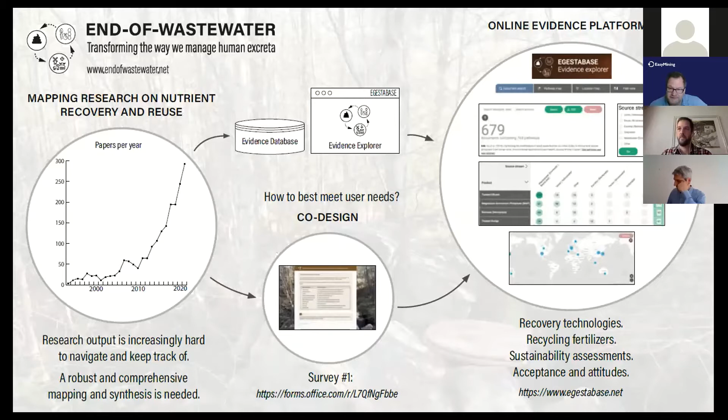Welcome everyone, and thank you for attending this presentation. My name is Adriana Romero, and I would like to present to you the LIFE ENRICH project. LIFE ENRICH stands for Enhanced Nitrogen and Phosphorus Recovery from Wastewater and Integration in the Value Chain, and it is funded by the European Life Program.

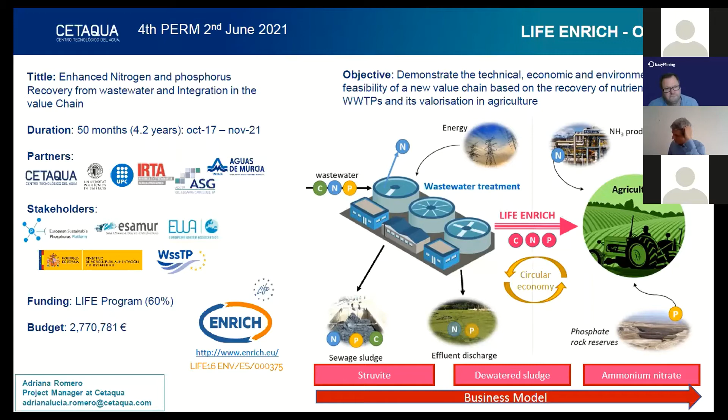Let me invite you to click this link and visit the project's website, where you can access details about the project objectives and results, as well as the partners and stakeholders involved. The main objective of LIFE ENRICH is to demonstrate the technical, economic, and environmental feasibility of a new value chain based on the recovery of nutrients from wastewater treatment plants and its valorization in agriculture. In other words, LIFE ENRICH offers a link between wastewater treatment facilities and the agricultural sector by producing biofertilizers and promoting circular economy. Today I will show you how struvite and ammonium nitrate are obtained within the project.

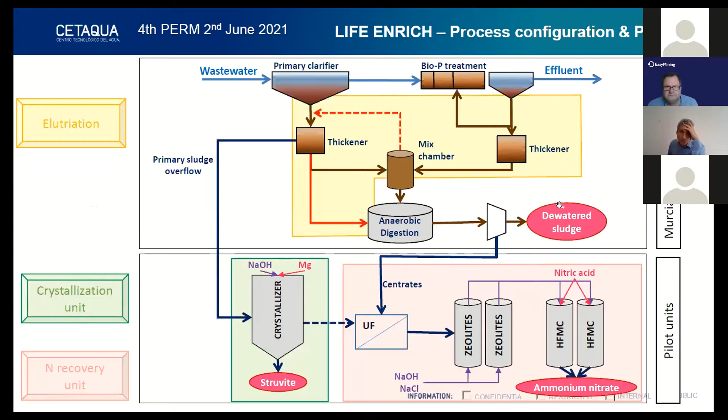Here you can see the process configuration that has been implemented in Murcia Este wastewater treatment plant in Spain. First, an elutriation process has been installed full scale, concentrating the phosphorus removed from the water line in the supernatant of the primary thickener. The supernatant rich in phosphorus is fed to the crystallization unit, where struvite is produced from the phosphate and ammonia present in the current and an external source of magnesium.

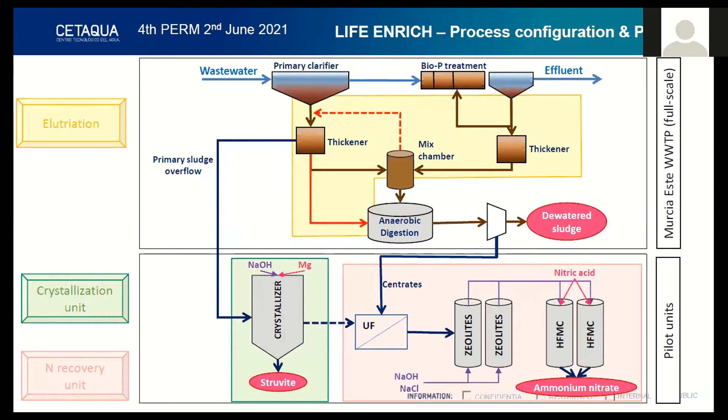For ammonium nitrate production, the centrates go through an adsorption with zeolites, where ammonium is adsorbed. Then a mixture of sodium hydroxide and salt desorbs and concentrates the ammonium and regenerates the zeolites. Finally, the concentrated ammonium goes through a membrane contactor and forms ammonium nitrate on the other side of the membrane.

Here you can see the pilot plants for struvite and ammonium nitrate production, and also what the struvite produced looks like. For the struvite prototype, a continuous operation with supernatant of primary thickener is producing about 5 to 6 kilograms per day of struvite, with a P recovery higher than 85% and a P concentration in the outlet of the crystallization reactor lower than 15 milligrams per liter.

Efforts are now being put on optimizing chemical dosing for magnesium sourcing and for pH control. Regarding ammonium nitrate production, around 40 liters per week of the salt are being produced, with an N recovery of around 70%. Currently, total nitrogen content of the ammonium salt is 7%, 50% coming from centrates and 50% from nitric acid, while aiming now to reach 20% as in a commercial fertilizer.

Both biofertilizers are metal-free, and struvite content of total organic carbon complies with quality requirements. Neither significant difference on organoleptic characteristics nor metals have been found in the vegetables grown with these biofertilizers, which are tomatoes and broccoli. Thank you.

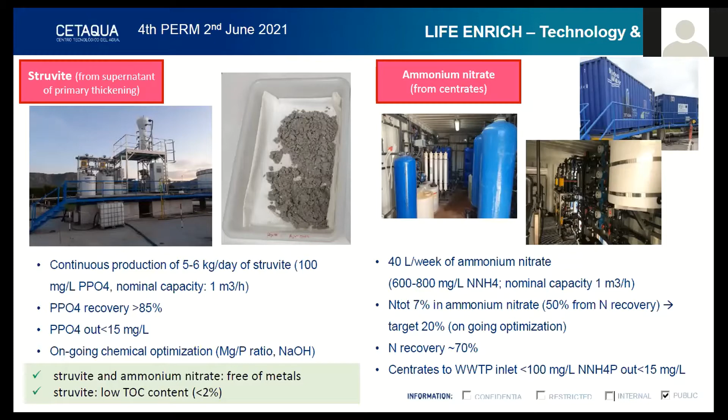Smart Plant was an innovation action with about 10 million budget and 27 partners, involving about 20 companies and several universities. Regarding nutrient management, we were integrating 6 existing wastewater treatment plants with different technologies at different treatment stages, aiming to recover nutrients and organic resources, and finally producing mineral fertilizers and biofertilizers, in particular recovering ammonium and phosphorus from secondary effluents.

This is also in order to achieve very low limits that are currently in place, for example in the UK: phosphorus recovery as struvite and phosphorus-rich sludge through side stream biological nutrient removal. You can go to the next slide.

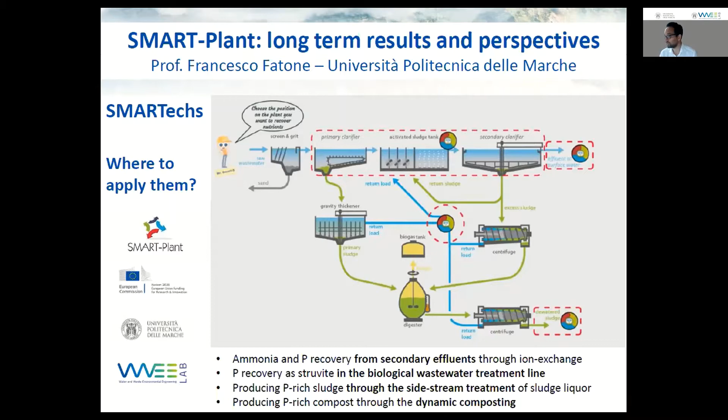How much were we able to recover? Well, our demonstration plants were operated for more than 2 years. In fact, all of them were submitted for environmental technology verification, and 2 of them were accepted. Another 2 are still under evaluation. Others were not eligible because of the pilot scale.

The challenge of Smart Plant was to address energy efficiency and greenhouse gas emissions, the water, energy, food, carbon nexus, by also targeting sludge reduction, and in parallel to recover resources and nutrients in order to have materials recovery as added value, which is of interest for utilities that are at the same time saving energy and reducing their carbon footprint.

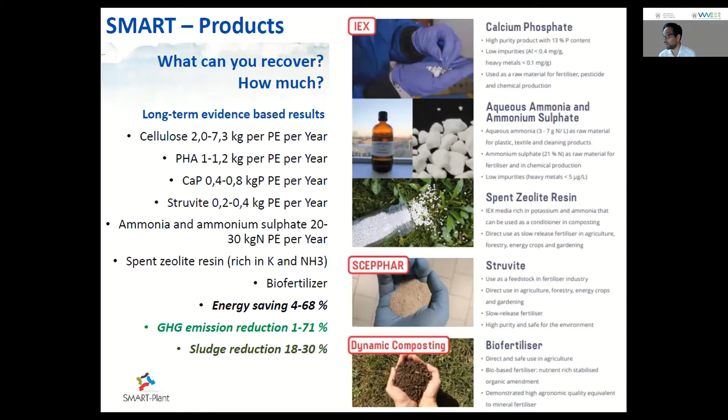Next slide. We were able to finally deliver, as I mentioned before in the plenary session, policy recommendations, because the end of waste is still a major issue, and legislation is still a barrier. To deliver these policy recommendations, we were also analyzing the potential market and the readiness of the market.

It's very interesting to see here, considering time to market and market size, that very often, especially when working with small and medium treatment plants, we have to address niche markets because the economy of scale will take time, for the merging and organization of utilities.

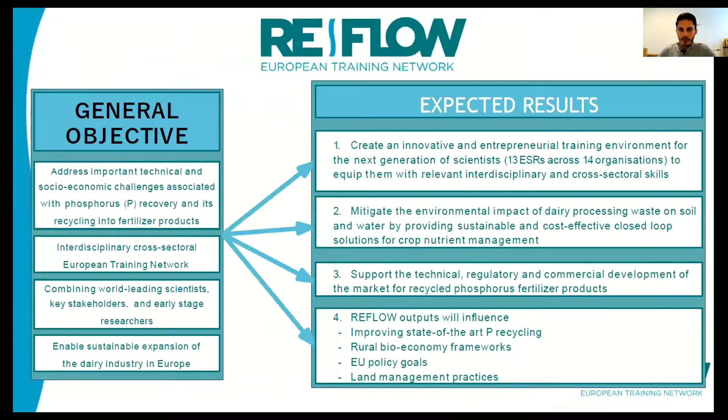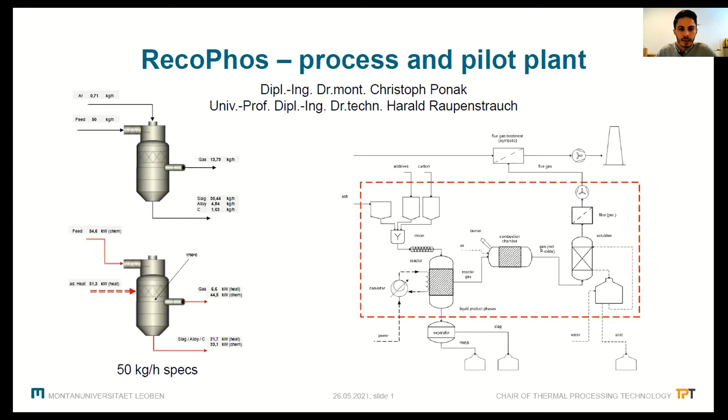These are the results that we have already achieved and confirmed. Phosphorus recovery rates in the thermodynamic evaluations are even higher. We have a full reduction of the complete phosphorus input and then a removal rate of over 90% theoretically, and over 80 to 85% validated in experiments.

What is becoming more interesting to us is the lithium-ion battery recycling that can occur in this reactor concept with the induction coils and the carbon cubes, where we can gasify lithium and also recover it as, for example, a carbonate, using these synergies in the same process. And of course, the steel making slag processing in this reactor is also still being worked on.

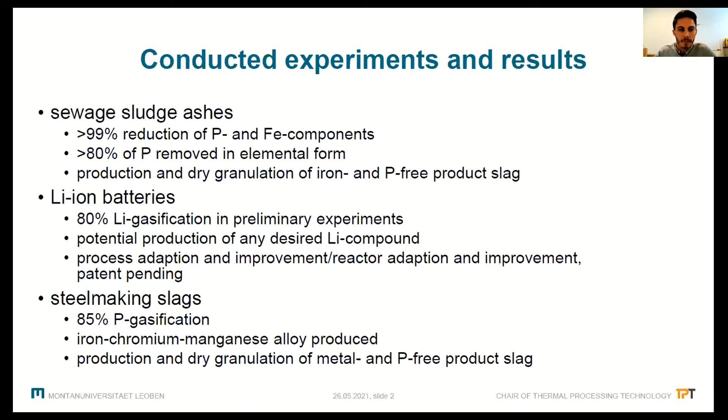Next slide, please. For the specific sewage sludge ash recycling project, the scale up to 500 kilograms per hour as a reference plant in Vienna is on its way.

We're starting a project in the beginning of next year with the consortium named here, a large process plant engineer in Austria, and Vienna Energy as the first reference plant site, in an EU project to be completed by 2024. Thank you very much.

Thank you, Christoph. If the reflow presentation is not there, then we would move on to the presentation of the HYDROUSA project, presented by Kostas Matsopoulos.

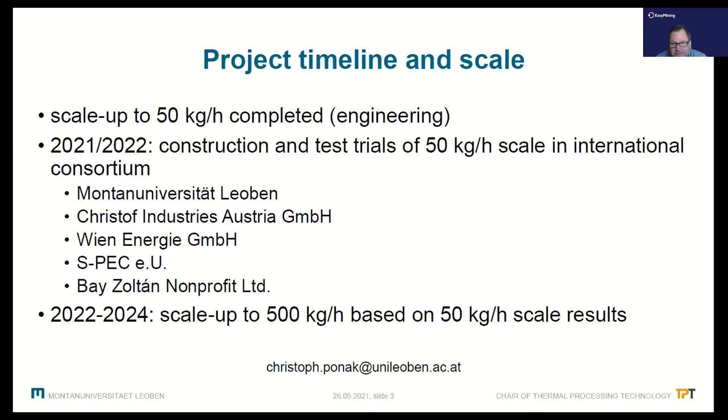Thank you, Christian, for the coordination and for introducing me. I will say a few words about the HYDROUSA project, a Horizon 2020 project coordinated by the National Technical University of Athens, consisting of a 28-partner consortium of universities, SMEs, and stakeholders from all over Europe. Our project aims to set up, demonstrate, and optimize on-site innovative nature-based solutions for the management of a wide variety of non-conventional water streams like wastewater, rainwater, atmospheric vapor water, seawater, and groundwater.

We can go to the next slide, please. The HYDROUSA concept can be briefly illustrated in this slide. HYDROUSA demonstrates at a large scale in 3 Mediterranean islands the feasibility and sustainability of innovative low-cost water treatment technologies to recover, among others, fresh water, nutrients, and energy from water.

We have a sum of 6 demo cases, which we call Hydro 1 till Hydro 6. Among them, Hydro 1 and 2 refer to an integrated wastewater treatment system and an agroforestry system closely related to each other. You can see in the center of the slide, Hydro 1 consists of a wastewater treatment system which combines anaerobic treatment with nature-based systems and disinfection, able to produce a treated effluent with appropriate quality depending on the needs of the agroforestry system for irrigation or fertigation.

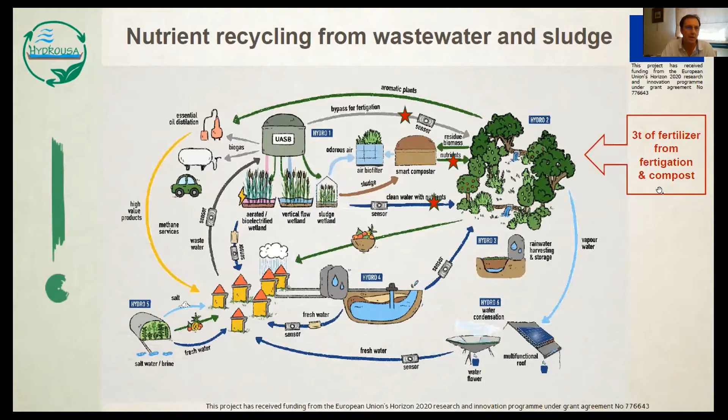I go to the next slide. Just before closing, we commenced operation a couple of months ago. Just a few photos: on the left, you can see an aerial photo from our anaerobic first stage treatment unit, which is a dual upflow anaerobic sludge blanket reactor with a total effective volume of 46 cubic meters.

On the right, you can see the two-stage vertical flow constructed wetlands. The upper one is the saturated case, and the other, downside, is a biodiverse unsaturated one. Just before closing, I should say that depending on the needs of the plants in the agroforestry system, we can switch the mode and alter the wastewater treatment in order to promote either irrigation or fertigation.

That's basically all from my side. Christian, thank you very much.

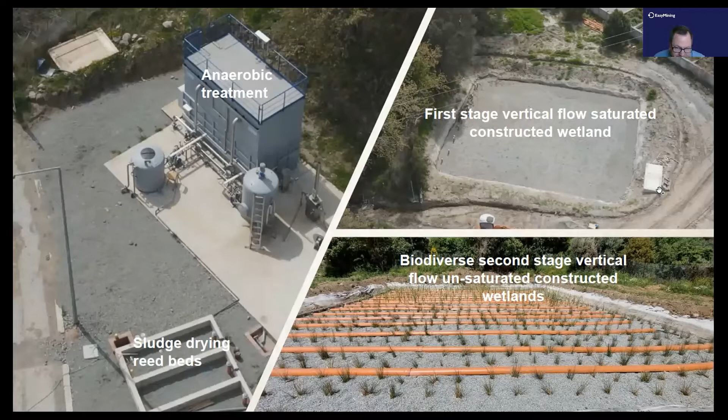Thank you. So the next presentation will be on the comparison of commercially produced struvite in Europe, presented by Mark Spiller for the project SUSVERT. Yeah, hello, I hope you hear me. Thanks for giving me the opportunity to speak here.

I will tell you about the project SUSVERT, within which we carried out a systematic overview of different struvites that are commercially produced in Europe. All the research I'm going to present here is just a small part of it.

So what did we do? We collected 25 samples, but one company was sampled twice, so effectively 24. We sampled municipal struvites as well as industrial struvites, mainly agri-food struvites, and compared their chemical, physical, and biological characteristics to the available regulation in the new fertilizer regulation mentioned earlier, along with plant tests on these struvites.

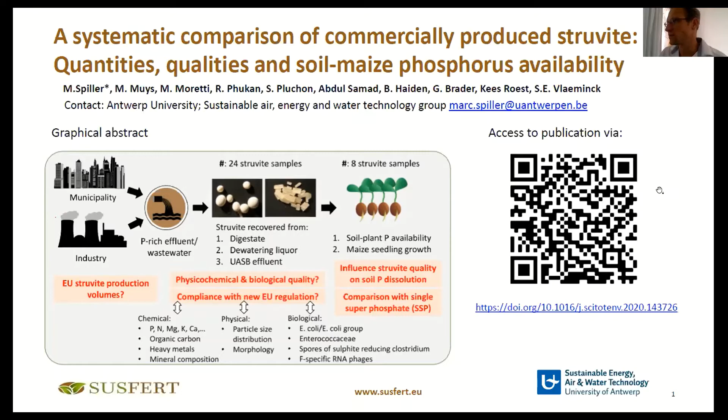We also looked not only at regulated properties, but also at morphologies that are maybe not regulated. We went a bit beyond, with the objective of seeing whether struvite could be an alternative in the common European market, or meet the newly set requirements.

I'll give a short overview here and not talk about everything, looking mainly at the chemical quality. The good news is that most struvite samples contain really good amounts of phosphorus, close to the theoretical level of 12.6% P in dry weight, with only 12 samples deviating more than 3% from that.

We also looked into heavy metal content. All samples were below the prescribed limits, though zinc was somewhat elevated. I won't show the data here, but you can access it through the paper.

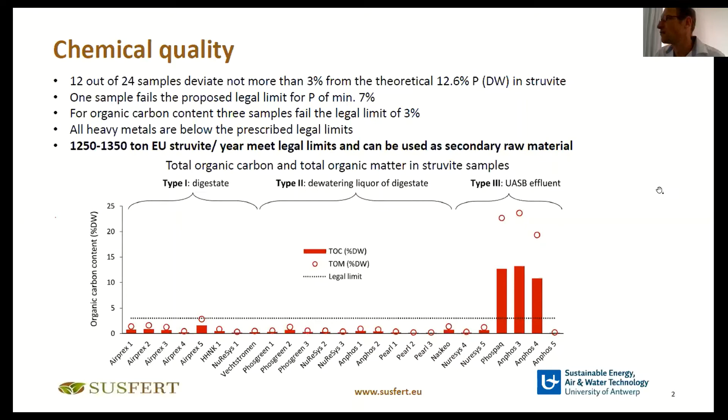There's a small mistake here - this should read tons of phosphorus in EU struvite. Based on our estimations, between 1,250 to 1,350 tons of European P in struvite per year meets the legal limits and can therefore be used as a secondary raw material.

As you may have noticed on the previous slide, we distinguish between different types of struvites in our research: those from digestate, those from the dewatering liquor of digestate, and those from UASB effluent, mainly from potato wastewater, shown in that figure. This is important because we see differences between those struvites, as shown in the figure.

Those coming directly from digestate and precipitated there have a typical orthorhombic shape, really looking like a crystal. Those coming from the dewatering liquid, especially some from UASB effluent, look nicely granular, almost like you'd want for a fertilizer.

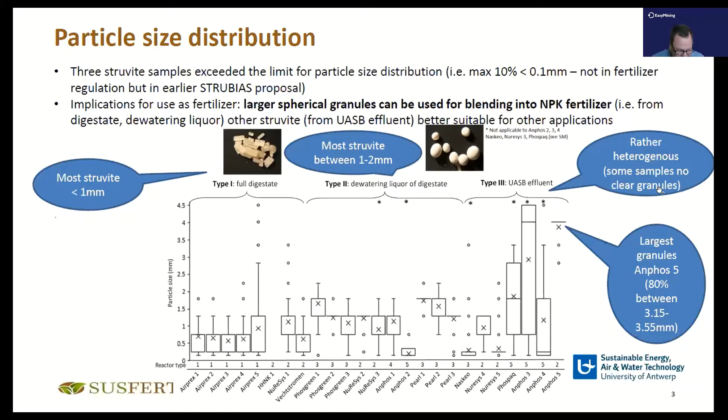Okay, hello everyone. I want to thank you for the opportunity to tell about our TYPKI project, which is resource-wise nutrient recovery from industrial wastewater or process waters.

We are dealing with industrial waters from mining, energy, and pulp and paper. It is a 2 year project, started just recently and financed nationally in Finland.

Business Finland is the main financer, but also VTT, University of Oulu, and industry have financed the project. I think we have gathered quite a good composition of companies, covering the whole nutrient value chain, starting from wastewater producers, technology suppliers, manufacturers of nutrient products, and end users.

Our main target is not actually nutrient recovery, but rather the focus is wastewater purification and pure water production. But because in every case we will produce concentrates, they need to be either utilized or safely deposited. That is really the main issue in this project.

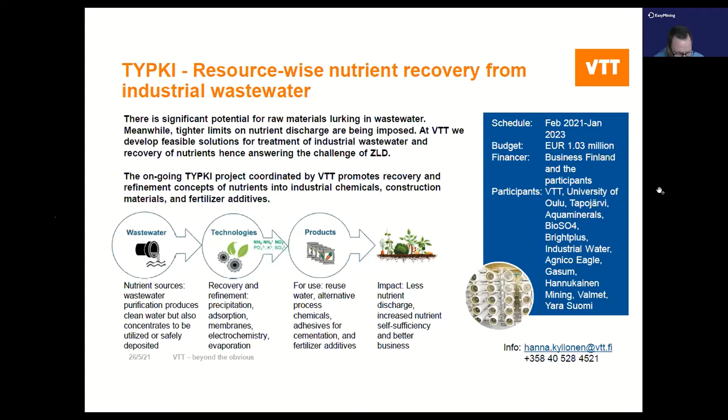Good morning, I'm Nicolas Morales, member of the Innovation and Technology Department of Aqualia, presenting the segregated collection and the decentralized treatment for resource recovery as proposed by the H2020 project Run4Life. In the project, we want to change the conventional, centralized and linear domestic wastewater treatment for a more circular approach based on decentralized treatment at the source.

We want to separate at the source black water, kitchen waste, and grey water, in order to apply technologies that allow us to recover more resources from that wastewater. For doing that, we also develop some innovative technologies and new business models.

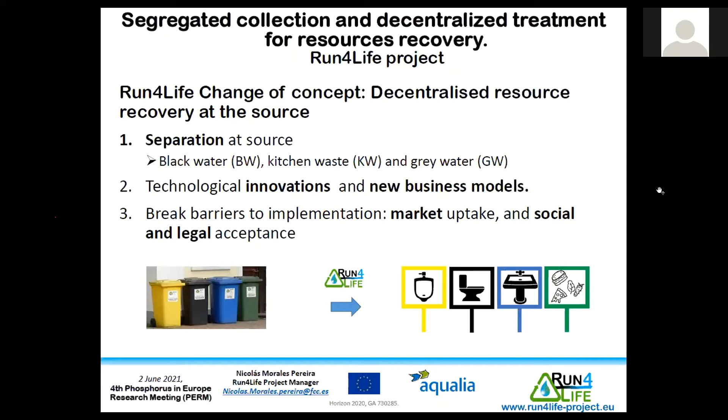In the project, we also have to take into account that we need to break barriers to achieve a good implementation, to achieve market uptake, social and legal acceptance. So we want to apply something similar to waste segregation to wastewater treatment, doing this segregation and decentralization. Next slide.

Here we can see a general flow chart. We have a segregation of streams in the buildings, in homes, in new areas. We apply technologies based on anaerobic processes to recover the energy from the concentrated streams, the black water and kitchen waste, and then technologies to recover the nutrients from the effluent of the anaerobic processes.

For the grey water, as this is a stream with a low concentration of pollutants, we can reclaim that water for toilet flushing, for process industry uses, and also for irrigation. We also develop technologies to increase the concentration of black water, such as the use of ultra low vacuum toilets that use only 0.5 liters per flush or even lower. So this is the general flow chart.

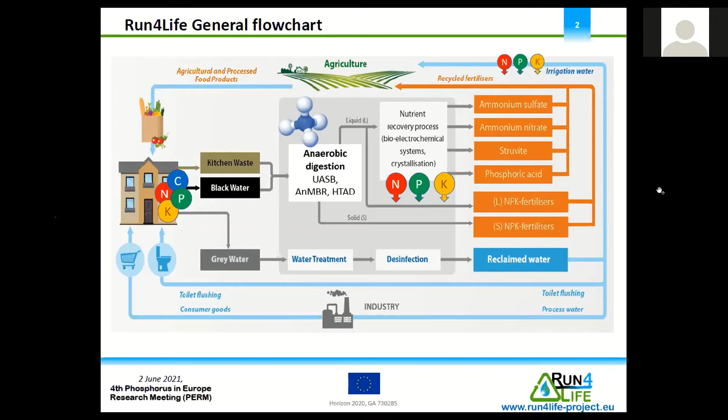In Helsingborg, the NPK pellets, that is a combination of food waste sludge from the anaerobic digester, struvite, ammonium sulfate, and commercial potassium chloride in the form of pellets.

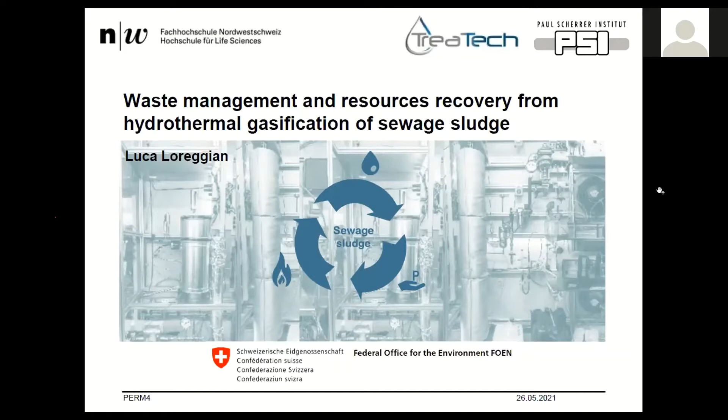Next slide, please. This is an overview of the project. In black you can see what has already been established and developed by TreaTech. By means of hydrothermal gasification, they can process digested and undigested sewage sludge to generate biogas. So biogas is the main product of the process, but there are some side streams that still contain valuable resources. This is the case of processed water, which contains ammonia, and the wet solids that come after the processing of the sewage sludge. These wet solids are very high in phosphorus, and this is why we are teaming up.

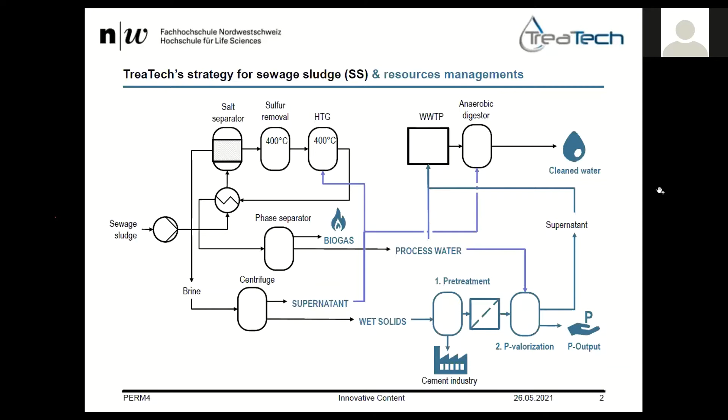To recover phosphorus, we are currently looking at different potential routes to recover phosphorus. We'll be looking at struvite precipitation or phosphoric acid production. And that's it. Next slide. I will thank you for your attention. I have my contact details in case you have further questions.

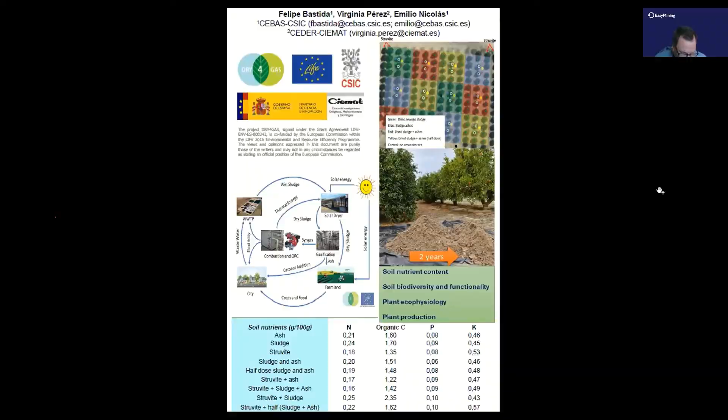I'll be talking about phosphorus recovery from bio-waste. The project we're talking about is Value Waste. It is one of the Horizon 2020 projects. The concept of Value Waste is that it is one of the first complete solutions to fully valorize urban waste to recover energy and nutrients in the form of food, feed, and bio-based fertilizers. I would like to call it state of the art, as the urban waste is completely used as a raw resource in a chain of processes to produce these high value products that have multiple economic, social, and environmental benefits.

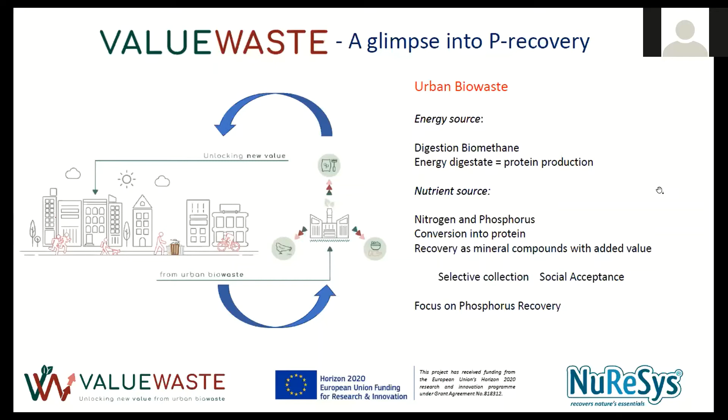Next slide, please. This project is implemented in 2 municipalities in Europe. The municipality I'll be talking about is Murcia, Spain. Different partners combine their pilot units in the process. It starts with the collection of bio-waste, which is 4 tons per day, and it is selective collection, which is very important for quality control. It is then fed to an anaerobic digester at the rate of 4 tons per day.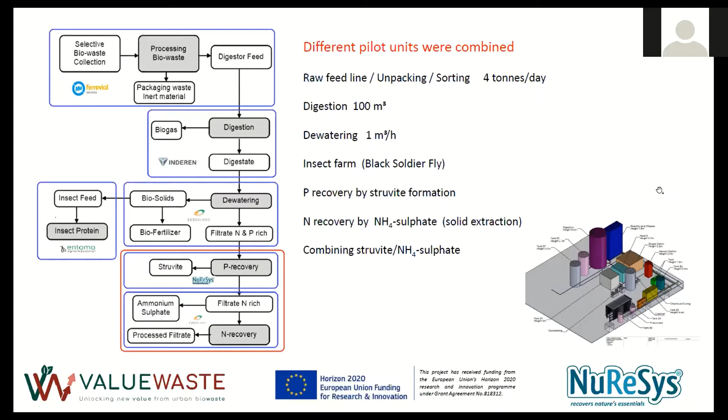The methane produced during the anaerobic process is fed to methanotrophic bacteria to produce microbial protein, and then the digestate is dewatered. The dewatered solid fraction from the biosolids is fed to the black soldier fly, which is used as insect protein. The liquid fraction from the dewatering is rich in nutrients of nitrogen and phosphorus, which is then used to recover bio-based fertilizers.

Next slide, please. So the NuReSys process in general — here you can see on the right-hand side of our screen the pilot that is installed in Murcia.

So the digestion process really helps to release the phosphorus and nitrogen from the solid phase to the water matrix, which is then extracted through the dewatering, and the liquor is very rich in orthophosphate and ammonium nitrogen concentrations.

For this particular project, our installation consists of a stripper and a crystallization reactor. The stripper is fed at a rate of 1 cubic meter per hour, and it helps to strip off the carbon dioxide, which helps to raise the pH. Then the water enters into the crystallization reactor where the magnesium ion is dosed, and through pH control we are able to precipitate out the struvite.

To discuss the progress so far, we are already working to optimize the dewatering of the digestate to increase the level of orthophosphate and ammonium in the liquor, so that we can start the production of struvite, which is expected to be 2 to 2.5 kilograms per day.

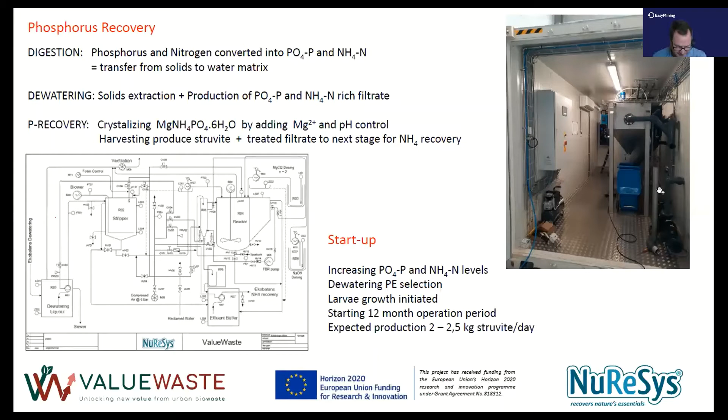I would like to talk a little bit about Water2REturn, which is a Horizon 2020 innovation action. We treat wastewater from slaughterhouses and extract the nutrients contained in there to further manufacture agronomic products. This way, we try to turn the wastewater treatment facilities included in the slaughterhouses into biorefineries.

So this is the system. There are 3 treatment lines plus an energy recovery module, and all of them work in cascade. We take the wastewater from the slaughterhouse that goes directly to the water line, where we treat it with an SBR, and afterwards with a filtration unit.

So we obtain, let's say, 3 materials: treated water on one hand, sludge on the other hand that is going to feed the following treatment line, and a concentrate of nutrients, which is going to be the first secondary raw material to further manufacture the first agronomic product, a fertilizer.

Then the sludge coming from the SBR feeds the sludge line, where it is going to be fermented together with bacillus, and we are going to obtain a hydrolyzed sludge that is going to constitute the secondary raw material to further manufacture a biostimulant.

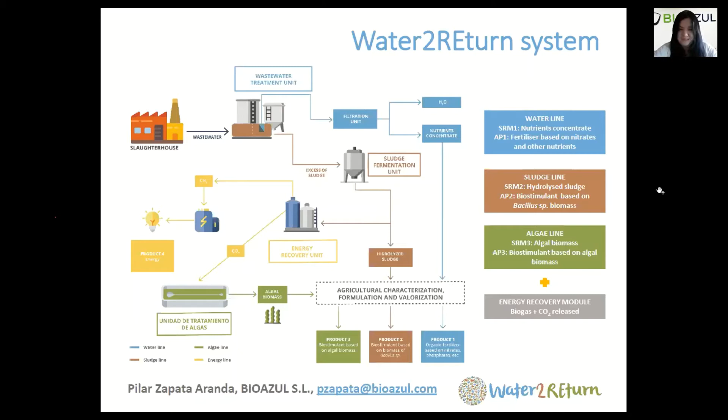This is the aspect our system has. It has been built in a real slaughterhouse, called Matadero del Sur, located in Salteras, a municipality near Seville in Andalusia, Spain. It treats 50 cubic meters of flow per day out of the 150 cubic meters that the slaughterhouse produces per day. This is because it is a demonstration project, and therefore we cannot do it at a real scale.

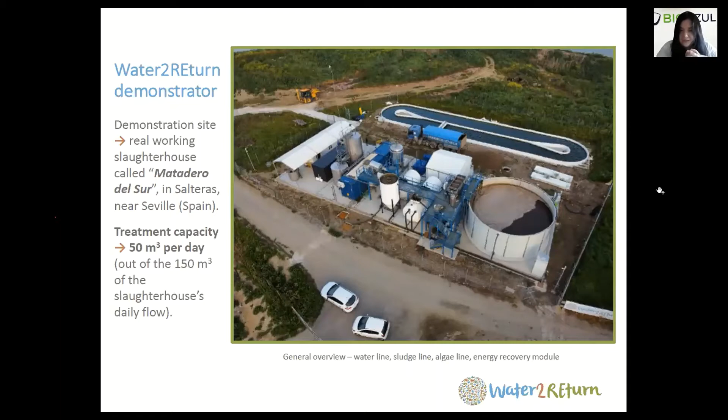Next slide, please. The key innovation and results are the integrated treatment system with separated treatment lines, because the system is modular and very flexible. This means it is possible to adapt it to different kinds of industries, use only part of the treatment lines, etc. It's also highly replicable because it's flexible and can be adapted to other food industries. The other key innovation results are the secondary raw materials and the agronomic products I have been mentioning before.

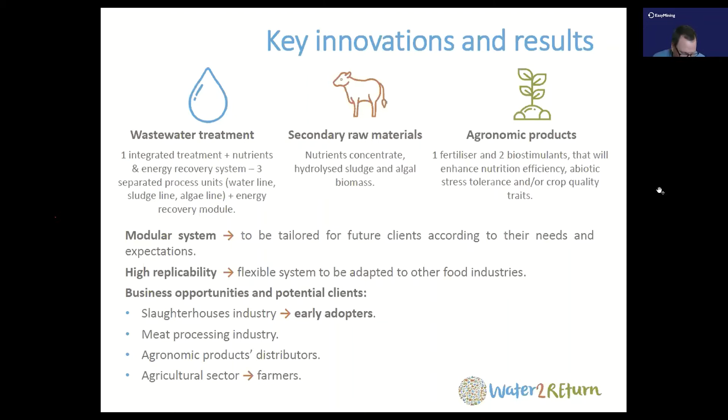First I will present vivianite. Vivianite is a new approach to recover phosphorus from sewage treatment plants that dose iron coagulants for phosphorus removal. The advantage of the process is that it can have high recovery efficiencies of over 50% of the influent phosphorus, and it reduces 10 to 20% of the sludge volume.

The principle is based on the finding that in these sewage treatment plants where iron is dosed, vivianite is the main phosphate-bearing precipitate in the digested sludge, and up to 70 to 90% of all phosphorus in the sludge can be present as vivianite. We can use wet magnetic separators to recover the vivianite from the sludge.

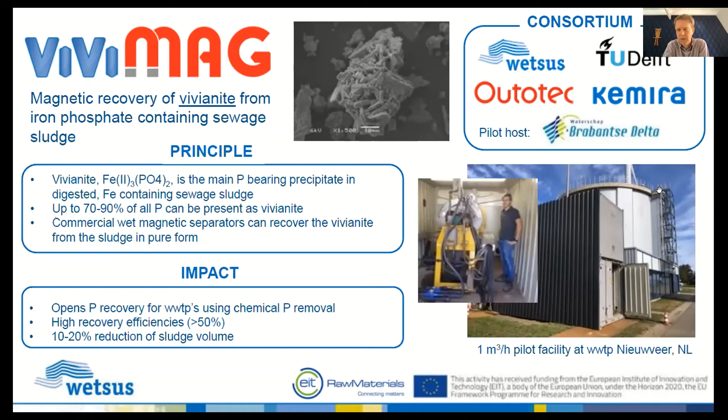We've demonstrated this in the ViviMag project at a scale of 1 cubic meter per hour at a pilot facility at the sewage treatment plant of Breda in the Netherlands. Next slide.

So this slide shows the principle behind the magnetic separator. We use magnetic separators that have been used in the mining industry for decades. These magnetic separators consist of a wheel that is dipped into the sludge and is then magnetized.

This wheel consists of a lot of rods that are then magnetized, and the vivianite sticks to these rods. The rods are then transported by the wheel outside the magnetic field and can then be easily flushed off from the magnetic wheel again and recovered.

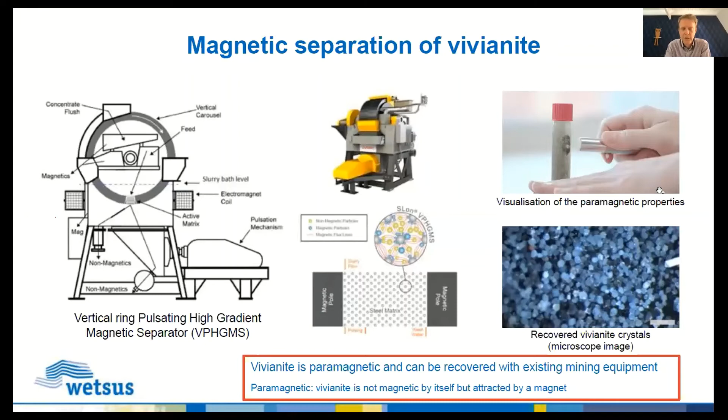To the right, you see an image of these crystals that we recover. Typically, they're in the size of around 100 micrometers. And the small image also shows the magnetic properties of the vivianite. Next slide.

But this other material can be easily washed off by a washing process, and then we can get up to 90% purity of the vivianite concentrate that we make. And overall, we can recover 60% from the sewage influent.

Vivianite can be used in the short term as an iron fertilizer to treat iron chlorosis in plants. On the longer term, we envision a splitting of the iron and phosphate so that we can reuse the iron again to bind the phosphate, and we get a water-soluble fertilizer. And we are now scaling up the project together with the partners.

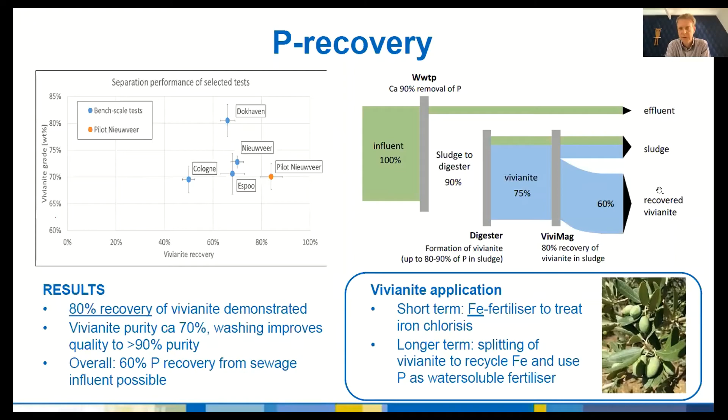Next slide, which is about the next new project, part of the larger water mining project, which is a big EU H2020 financed project with 38 partners over 12 countries that focus on 5 different case studies. The water mining project aims at resource recovery from various water streams, such as desalination, urban wastewater, and industrial wastewater.

As Wetsus, we will look at applying reversible phosphate adsorption to achieve ultra-low phosphorus removal. So we use adsorption to really go down to 40 ppb of phosphate in the effluent.

Using these adsorbents, the special thing about the approach is that we are able to regenerate the adsorbent in line, and in that way you get a concentrated liquid phosphate recovery product that can be used as a fertilizer. It also allows reuse of the adsorbent over and over again. This is important because at these low phosphate concentrations, you have quite low loadings of the adsorbent.

We will be testing this in a 1 cubic meter per hour pilot facility for 1 year on Cyprus and 1 year in Spain, to demonstrate a removal down to 40 ppb.

The main reasons to remove phosphorus to these low levels are twofold. First of all, you need to go to these low levels to prevent algae blooms. The second reason is that you can also prevent biofouling in subsequent steps, for instance, desalination.

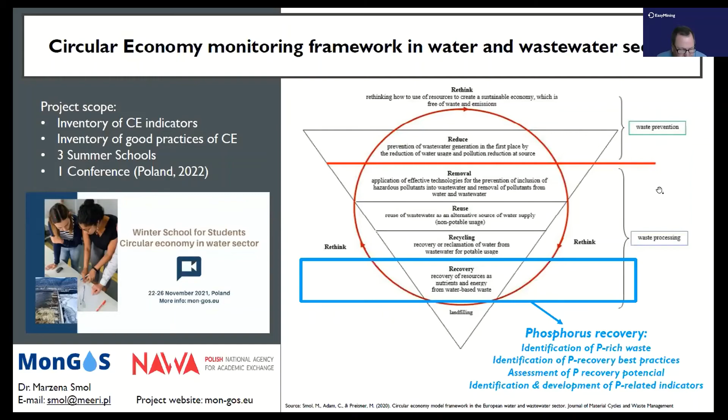Phos4You is an Interreg project dealing with the recovery of phosphorus from wastewater treatment. It started in 2016 and is finishing this year. We have our final conference on the 22nd and 23rd of September in Essen, also available online. We have concentrated our efforts on the development of processes and products to prepare the deployment of phosphorus recycling in urban, but also in rural areas.

Here are the different products and processes that have been demonstrated for large-scale applications. To produce phosphoric acid, we have tested sewage sludge ashes with the TetraPhos process, the Parforce process, and the Phos4life process.

To produce phosphate salts in different forms, such as hydroxyapatite, calcium phosphate and other kinds of phosphate, we have tested the Struvia plant of Veolia, optimized with bioacidification steps, as well as the Pulse plant, developed in Belgium by the University of Liège. Both processes use sewage sludge as input material. The last product is sewage sludge ashes with bioavailable phosphorus, produced with the EuPhoRe process, which also uses sewage sludge as input and involves thermochemical treatment.

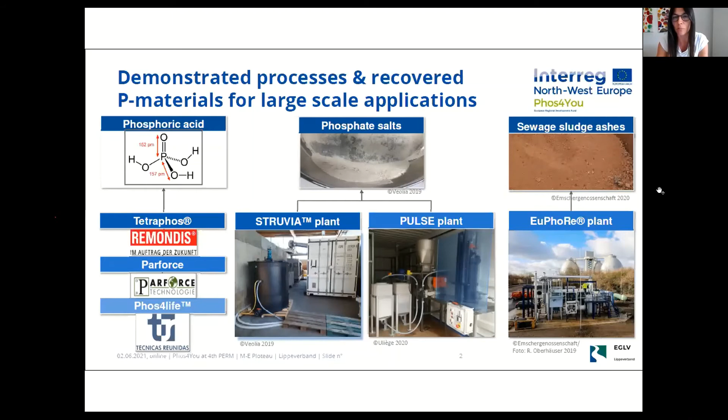Further on, for more rural and isolated areas, we have focused on developing processes aiming at phosphorus elimination while making a product directly usable on soil as a fertilizing product. We demonstrated three recovery processes: a microalgae reactor using Chlamydomonas acidophilus producing microalgae biomass; Filtraflo-P, using crab carapace material to produce a phosphorus-rich biomass; and a downscaled Struvia process using the effluent of the wastewater treatment plant to produce calcium phosphate. All processes underwent life cycle assessment, and all products underwent quality assessment by the different partners. Thank you.

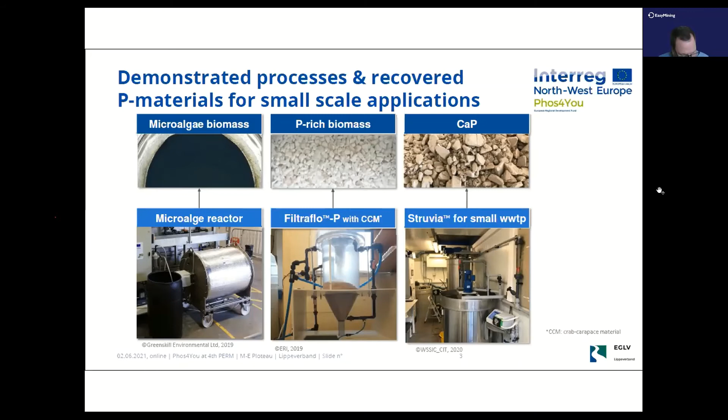Good morning. I'm a scientist at the Netherlands Institute of Ecology, and I lead a group on microalgae-bacteria interactions for wastewater treatment, focused on nutrient recovery. Here you already have an idea of the systems that we work with. I will start by giving an idea of our group's focus, and then focus on one specific project in the talk.

So our idea is to recover all the resources from the wastewater. We focus mostly on carbon, macro elements, and also micro elements. We work with all sorts of wastewater from diluted sewage, normal sewage, and concentrated black water, with varying concentrations of nitrogen from 100 to 1,400 milligrams per liter, and concentrations of phosphate from 10 to 100 milligrams per liter.

We grow microalgae in closed photobioreactors, all sorts of closed bioreactors, where we find removal rates from 20 to 160 milligrams of nitrogen per liter per day, and 3 to 30 milligrams of phosphate per liter per day. The idea is to be able to produce a fertilizer that we can use to enrich our soils, not only with carbon and macronutrients, but also the essential microelements.

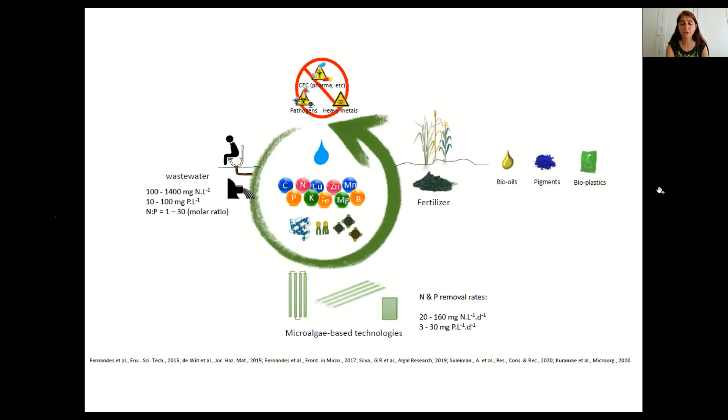In our systems, we also look at pharmaceutical removal and pathogen removal. Of course, due to time limitation, I will focus only on the nutrients.

And here is where I want to focus on this project. This is the Lotus HR, a collaboration between several universities in the Netherlands and in India, especially New Delhi, where we have pilot reactors running. In this project, we have developed photogranules, basically a combination of algae and bacteria. They produce EPS, both of them, and create a sort of matrix, a kind of glue, forming this nice photogranule that has a syntrophic relationship between these organisms.

The phototrophs produce the oxygen needed for the heterotrophs, and the heterotrophs produce the CO2 needed for the phototrophs, so you actually do not need to aerate. And because it's in a granular form, it's easy to harvest. So you have growth and harvest in one photobioreactor with no aeration needed. Thank you for your time.

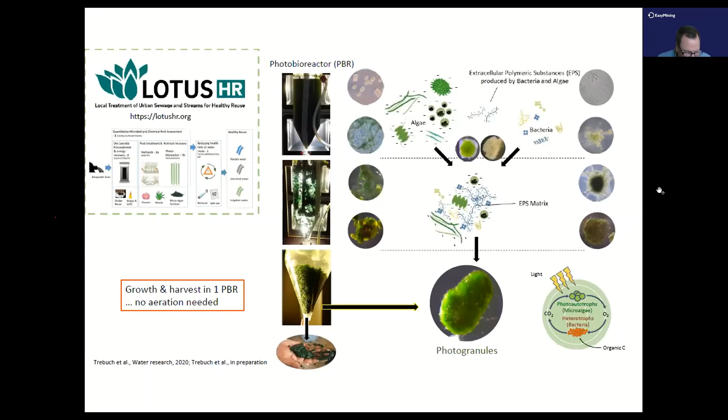Today I want to present the FlashPhos project, which is also part of the European Horizon 2020 program and recently started in May last month, 2021. The focus of the FlashPhos project is the complete thermochemical recycling of sewage sludge.

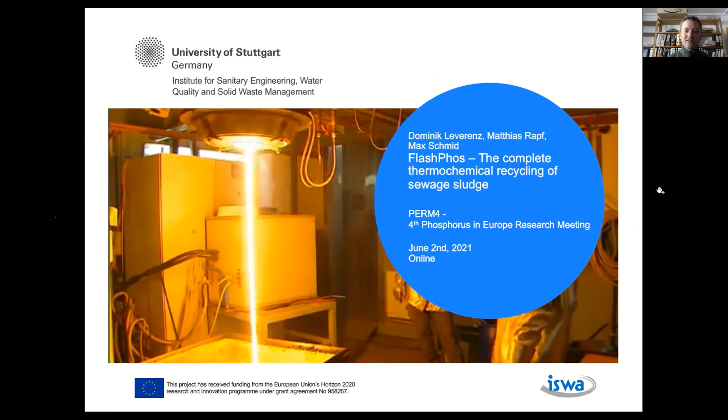In the next 4 years, the focus is on using the sewage sludge and developing a FlashPhos process with the aim to generate white phosphorus, but also side products that can be used as marketable products, such as alternative cement binder or iron alloy, or heavy metal concentrates for industry, and gaseous fuel for industrial applications. The main core processes are the drying and grinding of the sewage sludge, and the high temperature flash gasification to produce the white phosphorus and generate a climate-friendly cement.

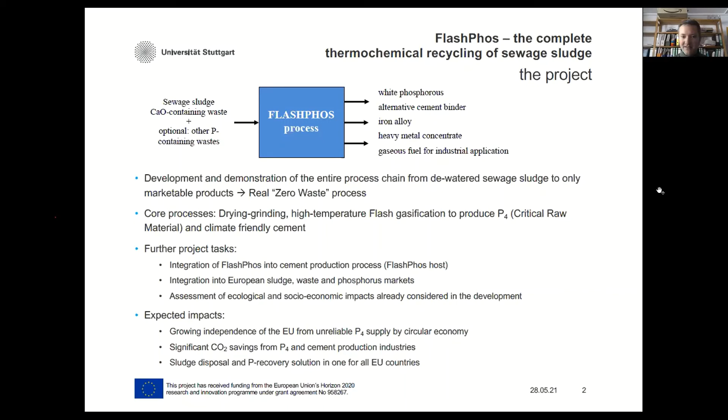Some important project tasks are the integration of FlashPhos into the cement production process, but also into European sludge waste and phosphorus markets. The ecological and socio-economic impacts are also assessed, and we expect that with the FlashPhos project, we can contribute to growing independence from unreliable phosphorus supply chains by increased circular economy within the European Union. We also expect to save climate impacts such as CO2 by climate-friendly cement production.

In the project, several scientific and industrial partners along Europe from countries such as Germany, Italy, Austria, Belgium, and Spain are involved. For further information, here are the contact details of the coordinators, Matthias Rapf and Max Schmid from the University of Stuttgart. Thank you for your attention.

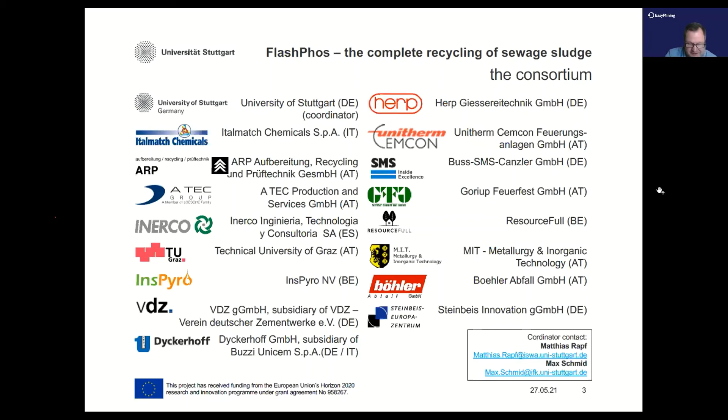Good morning, everyone. I hope you can still absorb some more information. The Next Gen project is about the next generation water system and services for the circular economy. In the infographic here, you see the circles, the nexus that we are studying: on one hand, saving energy and also water as resources, but more relevant today is the nutrients and materials.

There we have quite a few technologies on nitrogen recovery and phosphorus recovery. The project has 10 demonstration sites all over Europe. We demonstrate about 30 technologies. We received Horizon 2020 funding for about 10 million euros, and we are now soon into the 4th year of the project. It will run until mid next year.

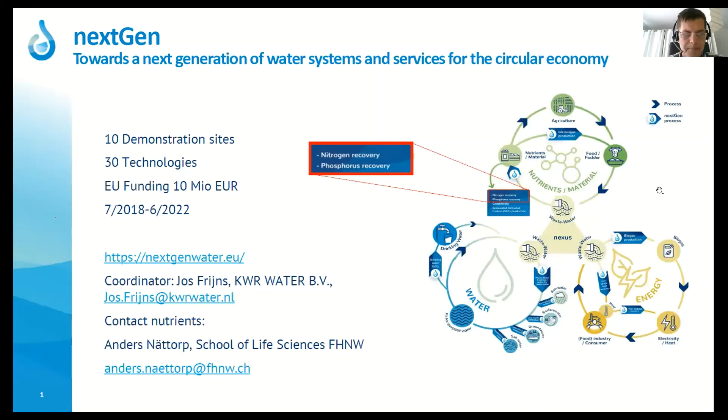Here you see the technologies for nutrients in the project: on one hand, phosphorus recovery technologies in red, and nitrogen recovery technologies in blue. You see also the TRL. We are starting with some technologies still in the lab, and the most advanced technologies like ammonia stripping are already in serial production. You see also a picture of this installation in Braunschweig to the right, a big stripping column.

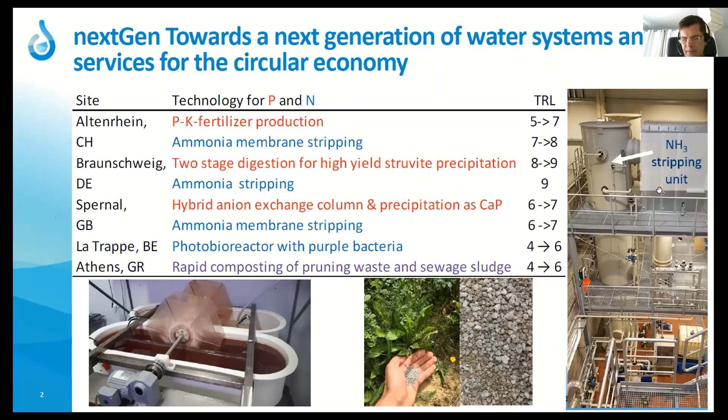These different technologies are demonstrated at 5 different sites that you see on the left. You also see a picture of our photobioreactor with the purple bacteria, bottom left. We also consider the products coming out. To answer your question, here's a product from the PK fertilizer production we have in Altenrhein, Switzerland. These are some examples, and you can consult our website for more information.

Many results are still coming up. We now have the sites basically up and running, and we will assess all these technologies with life cycle assessment, cost efficiency analysis, and chemical risk analysis for contaminants. This will flow into a technology evidence base with fact sheets describing the technology, requirements for using it, advantages, key performance indicators, lessons learned from case studies, and also legal and regulatory info and references.

So keep a lookout for that. It will be coming the coming year. And thank you from our side.

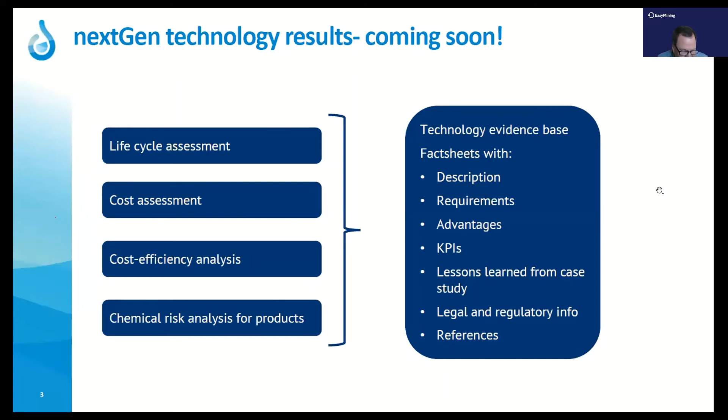Hey, and thanks very much for having us here. My name is Kati Blomberg, and today I will be telling you about the RAVITA process, which is an innovative nutrient recovery technology applied for wastewater.

Since 2015, HSY has been developing a nutrient recovery process called RAVITA. The main driver is that we want to be able to recover and utilize the nutrients also in the future. Our process enables the recovery of phosphorus as phosphoric acid, which can then be further processed into ammonium phosphate. The current technical readiness is estimated to be level 5 or 6 out of a maximum of 9. In 2019, a RAVITA demo plant with a PE of 1000 was built in the Viikinmäki wastewater treatment plant in Finland.

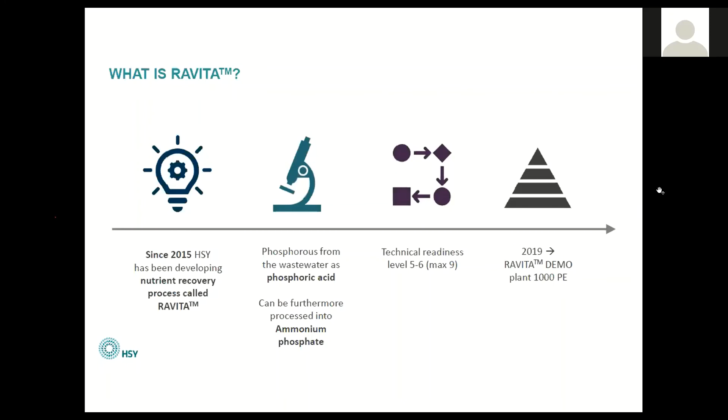So the basics of RAVITA, how does it work? In the RAVITA process, phosphorus is recovered only in the effluent wastewater. Contrary to conventional co-precipitation, in RAVITA no precipitation whatsoever is applied prior to or in the biological treatment. Phosphorus in the effluent water is separated in post-precipitation steps, such as disk filtration. The chemical sludge produced in the filtration is then further processed in order to separate the phosphorus. The following step includes dissolution with phosphoric acid, producing a metal phosphate solution for the following recovery step.

In the recovery step, we separate the phosphoric acid as the first end product with a solvent extraction process. As a product, we have a surplus of phosphoric acid, and therefore we're also able to create internal chemical recirculation. In addition, we recover some of the precipitation chemical that is recirculated back to the chemical sludge production step. At the end of this, we're able to recover from 55 to over 60% of the total influent phosphorus of the plant.

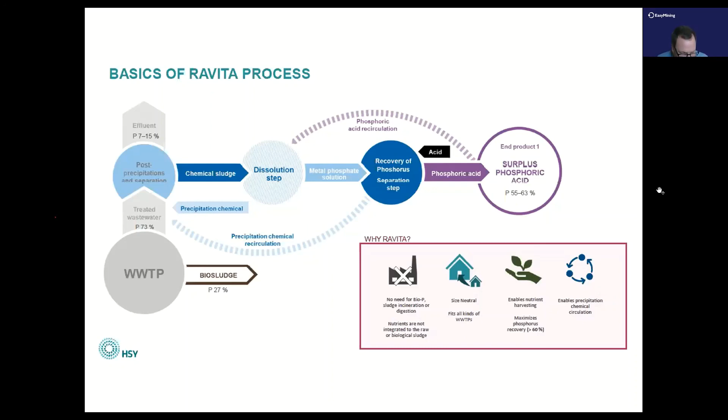Hi, good morning. And thanks for the invitation. We're actually located in the US, but we were invited to talk a little bit about what we do here in Vermont in the Northeast US. So it's great to be here quite early in the morning.

Rich Earth Institute is an NGO. We were founded in 2012 as a grassroots community urine recycling program. We still operate that community scale program. We have about 200 volunteers who donate about 40,000 liters of urine to us every year, which we pasteurize and use as fertilizer on local farms. But we've grown a lot, so that program serves as a research platform for many different types of research we do here. We've done pharmaceutical research looking at fate and uptake, we do a lot of social research, agronomic research, and our main focus at the moment is technology development.

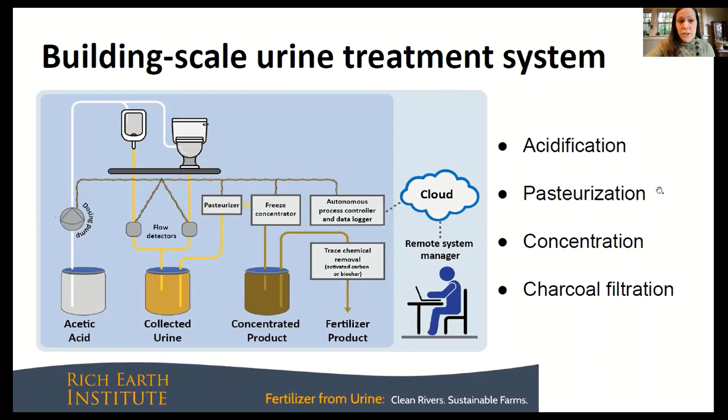We originally intended this system to be used for urine, but we're now working on expanding it to be used for source separated black water in combination with anaerobic digestion, for more complete nutrient recovery and to offer a full sanitation solution to the buildings we're working with.

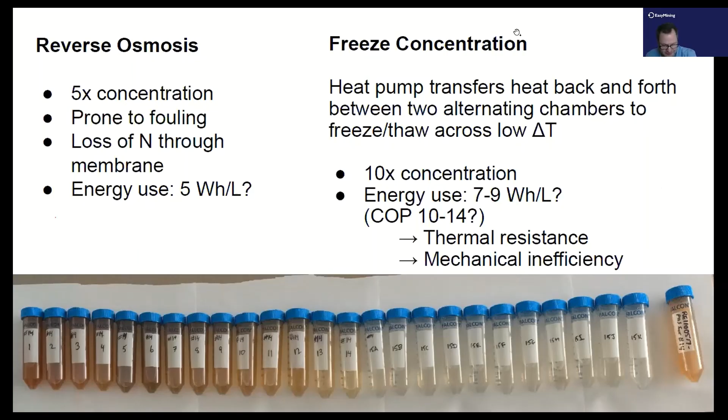My conclusion is that a lot of technologies are there, and yes, we can recover nutrients. Of course, the scale is also pretty broad, from a few kilos or tons per year up to several thousand tons. So that's what we see.

There's still a strong technology focus, that's what I notice. What I'm a bit missing still is really the link to the market for the recovered materials. But of course, if you have a project with a limited budget and duration, you cannot cover everything. Let's hope the Commission and the funding programs will consider this crucial part of the value chains, or in future terms, the value cycles as well.

Having said that, I would like to thank you for this very dense program this morning—22 presentations in just 1.25 hours, so that's pretty much like speed dating. But I hope at least every one of you got the key messages, and there will be a kind of after-show, where the key questions will be forwarded to the speakers for direct answering.

So Bertrand, do you have some closing words from your end?

I noticed a bit the categories of the projects. So what I will put on the slide is that yes, it's very active. We have different technologies and different products being looked at, but there are also some projects looking at value chain integration—this includes communication and improving communication between the stakeholders. We will probably put all the project links somewhere in the minutes of the workshop.